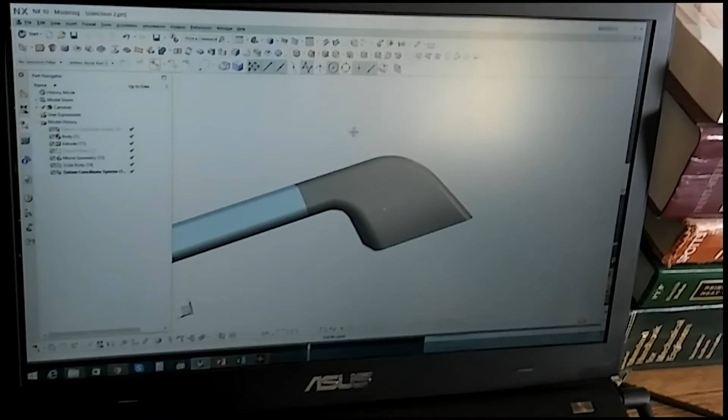Hello, my name is Steve Samuel from Design Visionaries, and today it's my privilege to show you a technique that we call the advanced shell technique for automotive components.

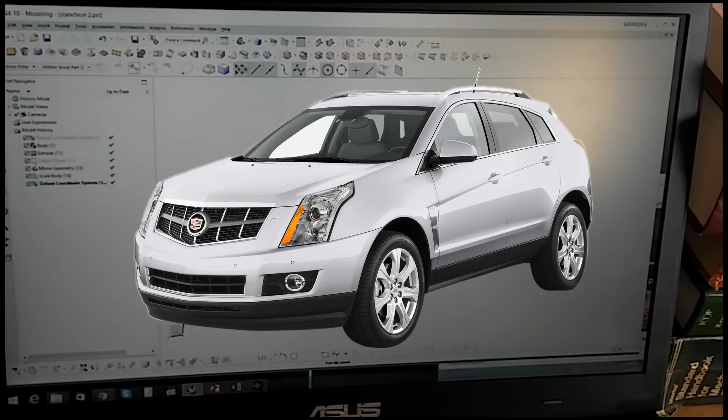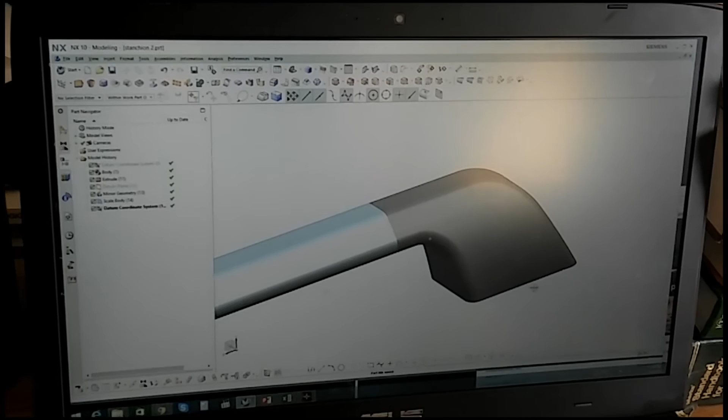Here we have two stanchions, a rear stanchion and a forward stanchion for an automobile. They're simplified geometries, and these are die-cast geometries. In general, the way this is done is you will get industrial design surfaces from a program like Alias or Rhino, or you can do them in NX if you're good enough. And they will be industrial design surfaces that will have to be shelled and turned into a real component. Now, as we do this little demo, we're going to be using something called the vehicle coordinates technique.

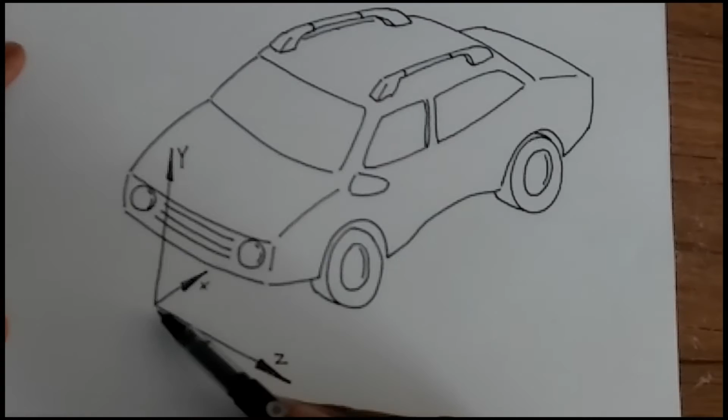As you can see, there's a coordinate system in this file. This coordinate system represents the coordinate system that we're going to use for this automobile. I've drawn this little graphic for you, so you'll understand that we're creating all of our geometry with respect to a coordinate system that everybody on the team agrees with. So if you're going to do some chassis work or some accessory work back here, you know that there's a coordinate system that everything has to match up to.

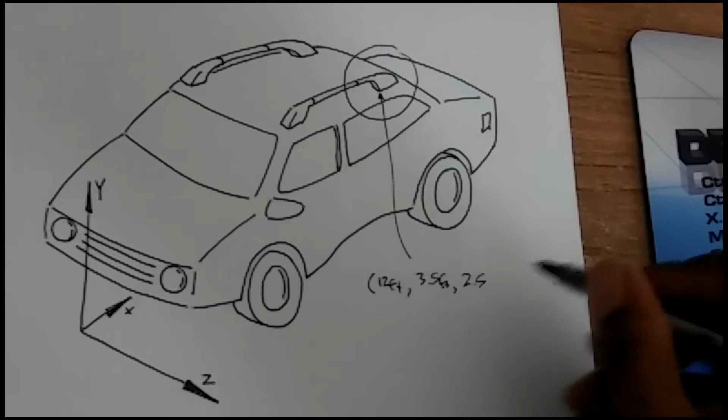For example, this stanchion that we're building has a vertex right here. That vertex can be described in XYZ relative to this coordinate system. The X would be about 12 feet, the Y would be about 3.5 feet, and the Z would be about 2.5 feet, let's say. Therefore, when we build this piece of geometry and we're finished, all we have to do to get it into the assembly and sync it up is to make sure that the central coordinate system syncs up.

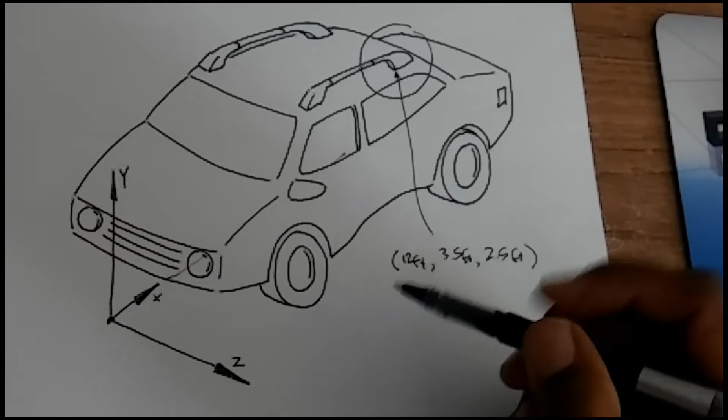So it's vehicle coordinates. I've got X going straight back, Y going straight up, and this ordinate is as if there were a flat piece of roadway, and this 0, 0, 0 ordinate is right on the roadway. So, to proceed, we can now start doing our various techniques on this back stanchion.

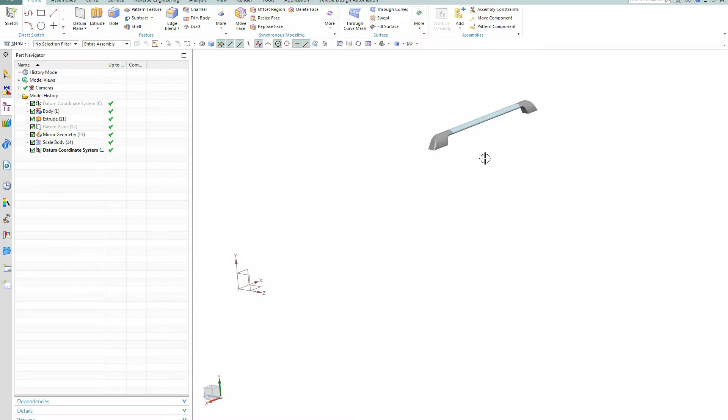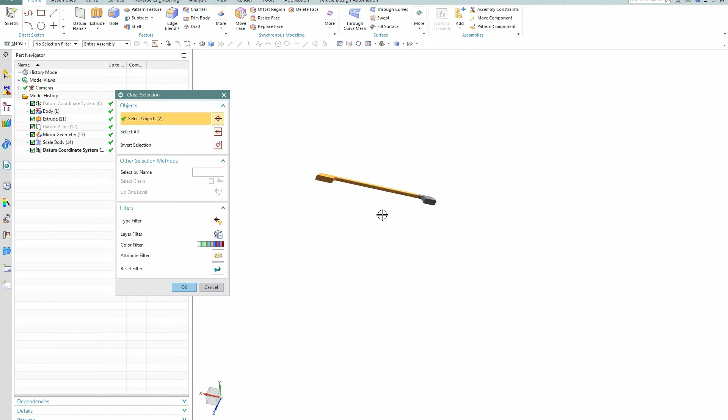The advanced shell technique is really great for creating things like die-cast parts and injection molded parts. What we have to start with is the industrial design surfaces sewn together in one fat solid, and now we have to scoop this out and do all the things that make sense to make this a die-cast part. The first thing I'm going to do is simplify the file, so we're working with just the geometry we want. The next thing is to establish a pull plane direction, the direction in which the two halves of the die-cast mold will be pulled apart.

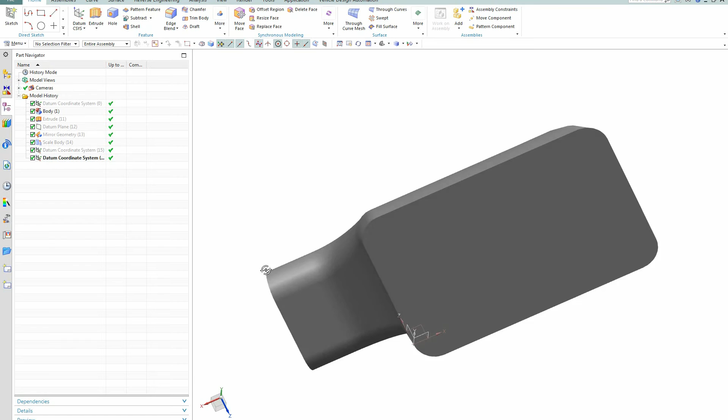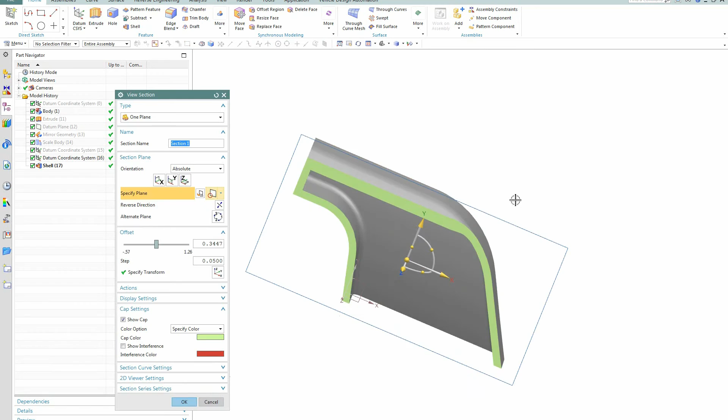So this is the Y-axis. We're going to use that as our pull plane direction to shell out this part. Now, if everything was simple, we'd use the shell command, type in a wall thickness, for example 0.1, and shell it out like that. This would be totally unacceptable for die casting, because as you can see, it does a nice job, but all of this geometry would be impossible to take out of the mold. There would be a huge undercut. Another reason is, in many cases, the geometry is too complex for the shell.

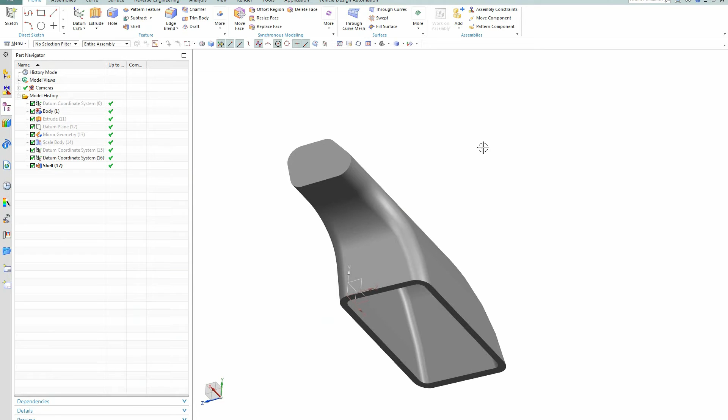So I'm going to delete that and bring back the geometry. Now I'm going to show you the shell technique. I've established the pull plane direction, the Y direction. As an overview, I'm going to show you how to create a parametric and associative copy of the outside geometry, then hack away at it and offset it to create, in essence, the inside of this component. Then I'll be able to cut ribs and stiffeners and all these different features, and easily do one large subtract at the end to have a finished piece.

To start with, we need a command called extract geometry. It's in the feature more command, under the associative copy group. In this feature, it is very important to have the associativity switch on and the fix at current timestamp switch, because these make sure that if I make any changes to the original surfaces, it's going to be duplicated and redone, and everything's going to go with that.

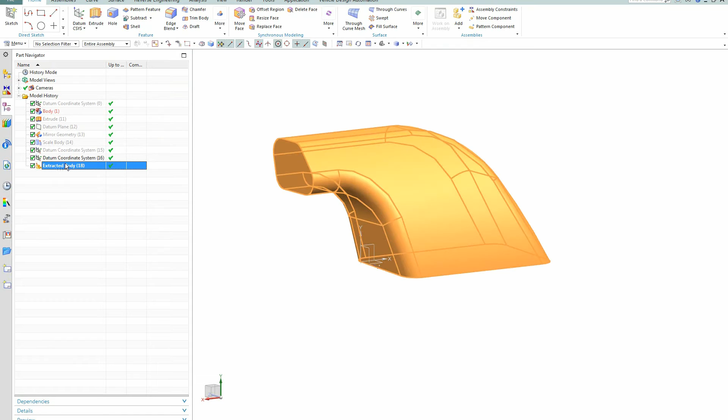So you'll definitely want to have these two switches on. And I select the geometry, I say OK, and that creates an extracted copy. Now the extracted copy is right on top of the original, and so I'm going to hide the original and bring up the copy. And as you can see, I'll put a color code, light blue, deep sky blue, on

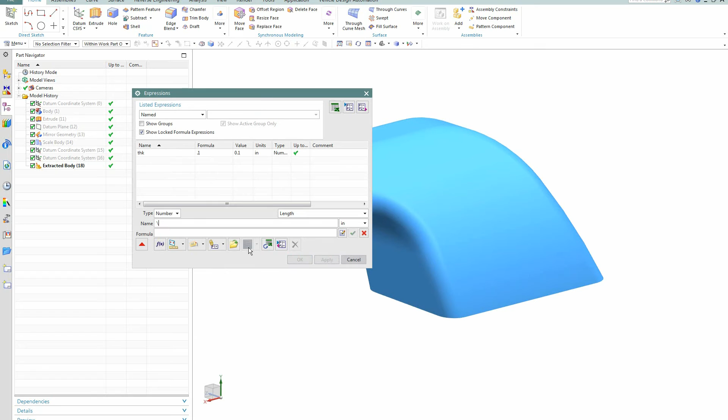the copy. Now, NX has a very, very powerful thing called an expressions editor, and I'm going to type in a variable, thickness equals 0.1, and that little variable is going to help me as I go through the process of creating different geometry. When I create ribs, I want them to have a relationship to this wall thickness, and when I do some other operations, there's going to be this THK, this variable that drives everything. That's really a very powerful technique.

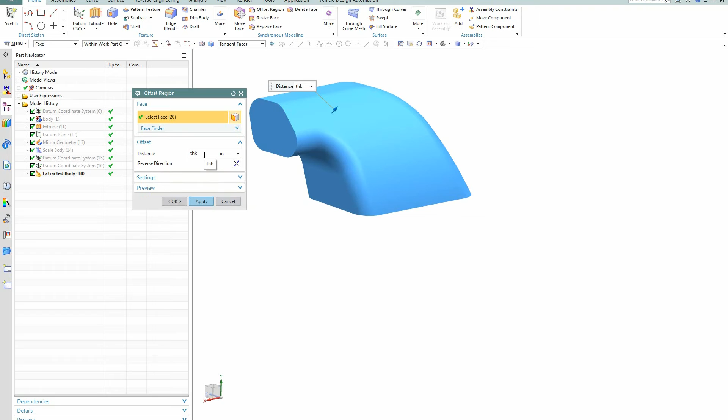My very next step is to offset what I can. I'm going to use this command called the offset region, and I'm going to select a number of tangent faces, and I'm going to set those faces equal to my variable THK. As you can see, when I type in THK, I need to do a minus THK. That shrinks the geometry down, and as you can see, if I have a little clear transparency of the original outside, what I'm doing here is creating a piece of geometry that represents the inside.

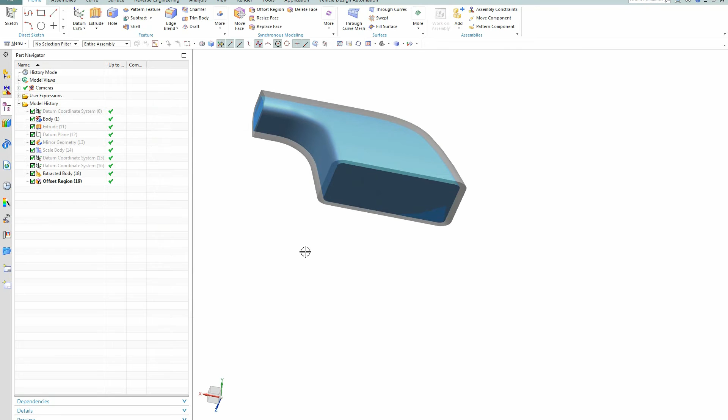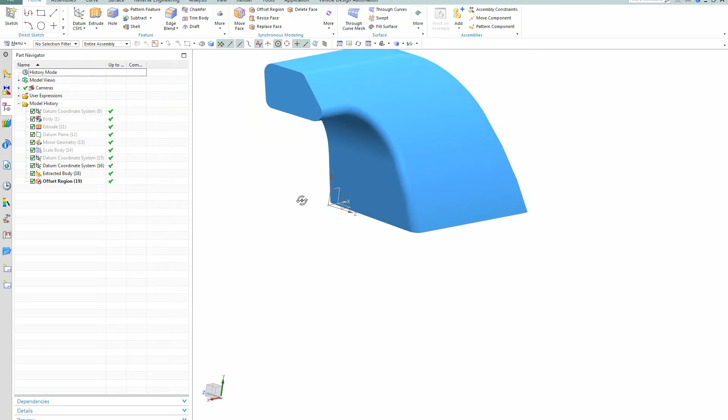So now that I've done that, I'm going to start to hack away at the model that I've created. Oops, let's go Control B. Let's get rid of that outside for a second. And I'm going to start hacking away at this model. Now if I bring back the coordinate system that I made to represent the pull plane direction, you can see that if I view it in this direction, all of this geometry out here is undercut, if you will. Every surface on this piece of geometry has to be tilted relative to the y-axis, because that's going to be the direction of pull.

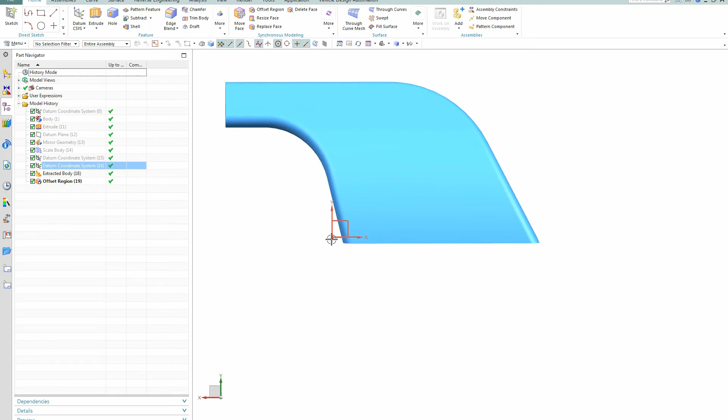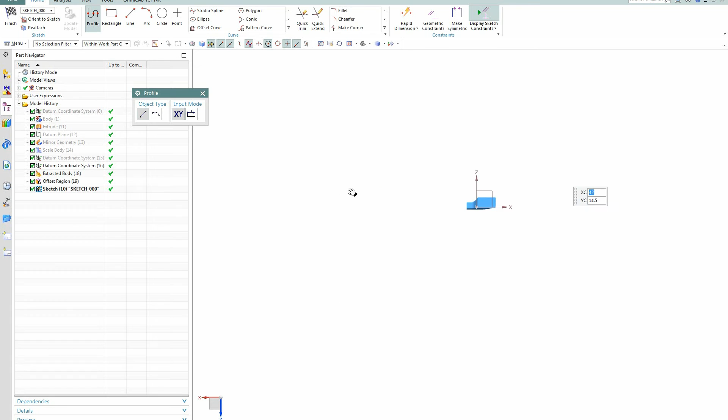So, and it's got to be tilted in this direction, which is opposite of that surface, and it's opposite of that surface. So now I'm going to use a nice little crafty method to lop off, if you will, the geometry that I know will give me troubles. And in order to do that, I'm going to do an extrude command, and I'm going to use a plane that is orthogonal to the direction of pull. And what I'm going to do is define a little piece of geometry. I'm going to use the project curve command to get that little piece and that little piece there.

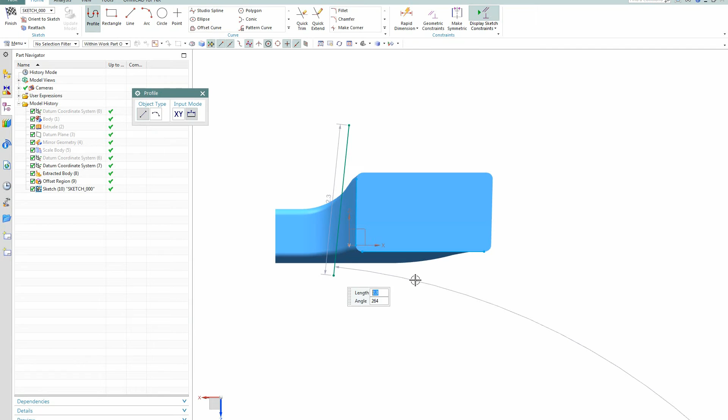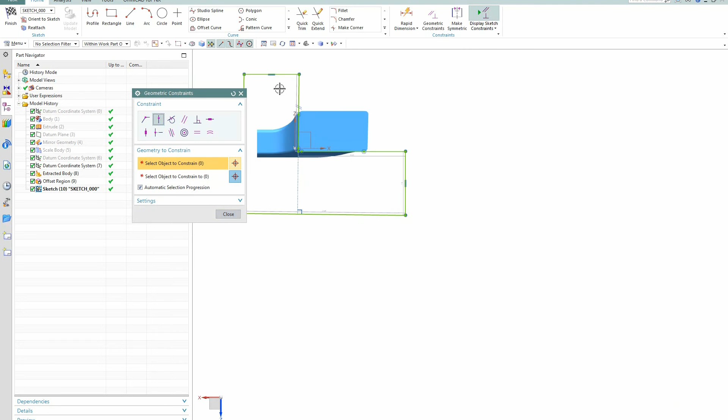And what I need to do is establish a cutter, if you will, this can be crude, that I'll use to cut off all the geometry that doesn't fit. So for example, I'm going to use a command called point on curve to get this cutter aligned perfectly. There we go. And I'm going to make sure I have enough geometry so that it will cut everything that I need to cut. And now when that geometry is extruded, we'll just extrude it like that, and we'll go from 0 out this way. So that's going to be a good cutter.

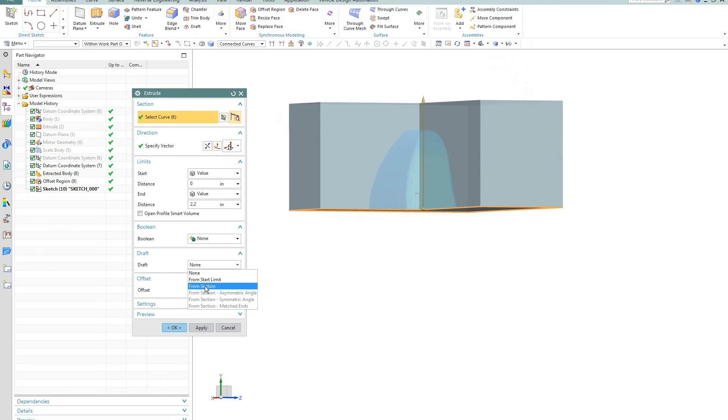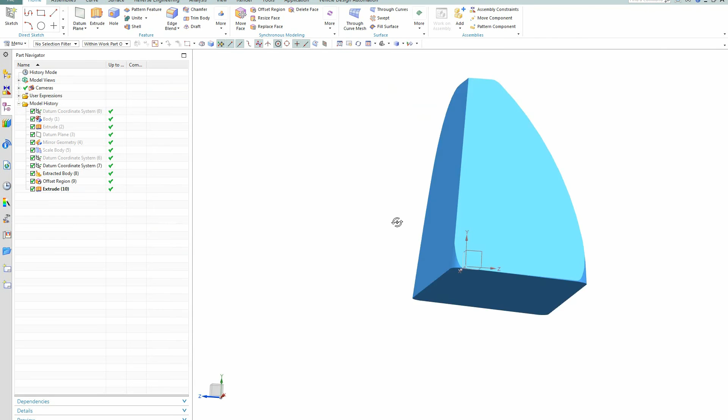But as we cut, we're going to use the draft command, and let's just assume that 3 degrees will be a good draft angle for these surfaces. So when I subtract this big cutter block from the original geometry, I get a piece of geometry that is far more suitable for the interior, if you will, of what we're creating. Now, I don't want any sharp corners on this piece of geometry because that's a stress riser, and I'm going to put in an arbitrary blend, if you will. Let's just change that a little bit.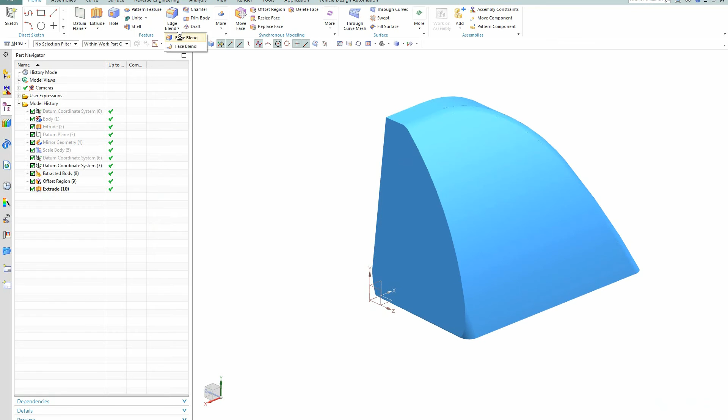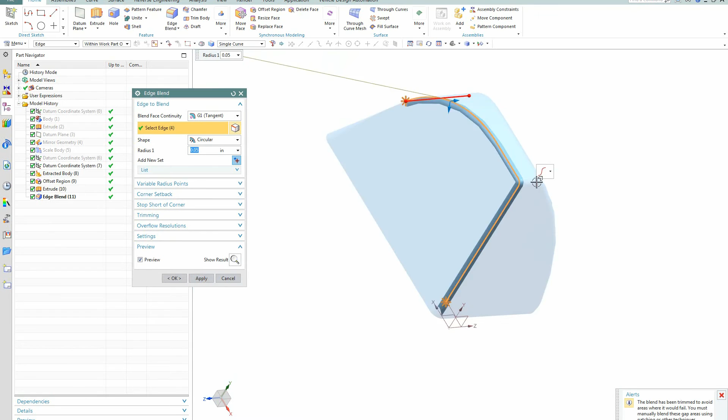We'll go to the edge blend tool, and we'll go to the selection intent manager, and we'll just select the portions that make sense to blend. Say apply that way, and we'll blend off these edges as well. Got to select individual ones that make sense and leave out the ones that don't make sense. So there we go. We're going to blend those edges. And now we have a much better piece of geometry.

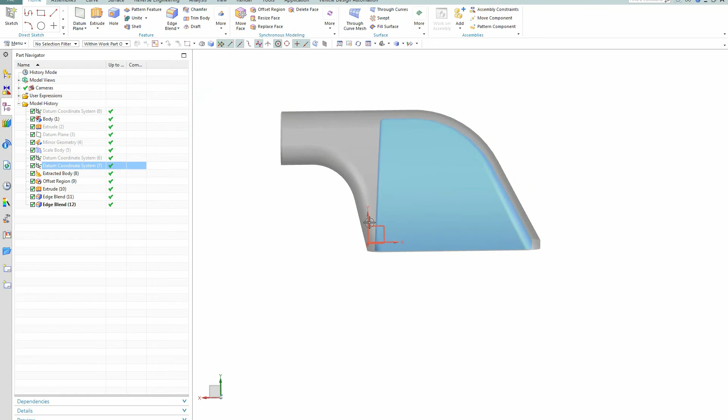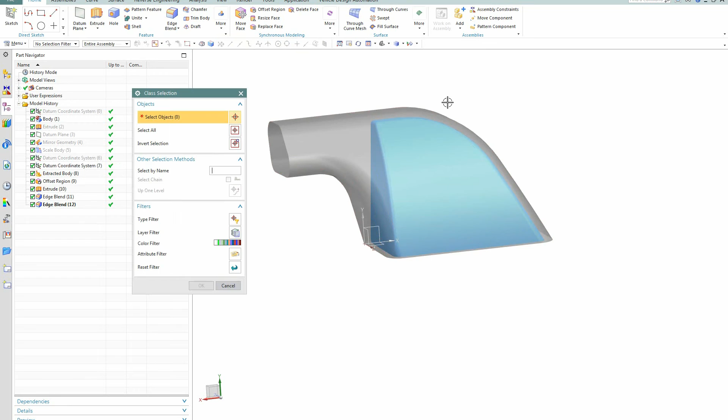If I bring back the original again, you can see that if we're assuming the y-axis is the direction of pull, this piece of geometry is actually able to be pulled out of the mold, and so is this. This is angled relative to the y-axis. Terrific. Now, we don't want to just take this out. We want to create certain ribs in our internal cutter, if you will. So now, operating on this piece of geometry, we can do that.

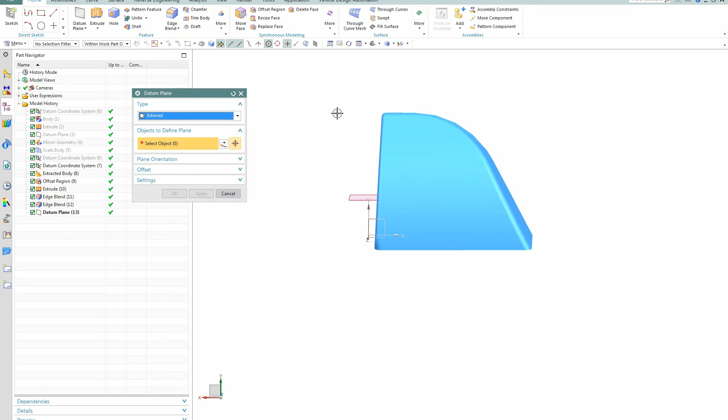We can go and we can create a datum plane that is offset from the pull plane for a reason that will become very obvious in just a second. So we're going to create a datum plane. I'm arbitrarily going to give it 0.5 inches. And on that datum plane, I'm going to sketch a pattern of ribs, kind of a honeycomb, that I want to have performed on my cutter. So I'm going to go to the sketch command, and I'm going to select that plane on which to sketch.

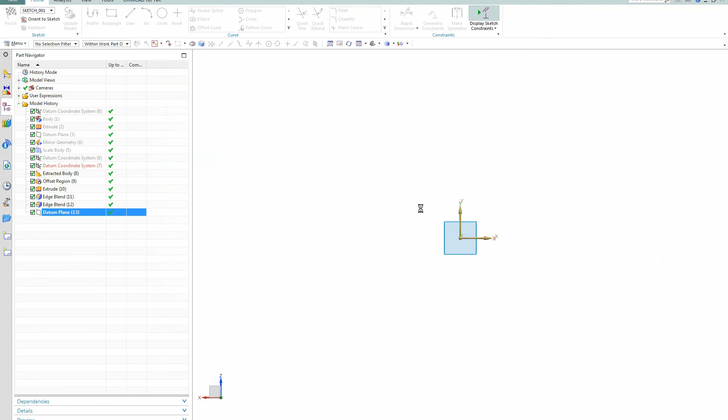Okay. Let's do a fit command here. Let's get over here. And what I'm going to do now is just by eye. Of course, if this were a production job, I would take more time and do this. It would take a while. It would make a terrible demo. But I'm putting in these rib structures, and in just a minute you'll see how powerful this technique is.

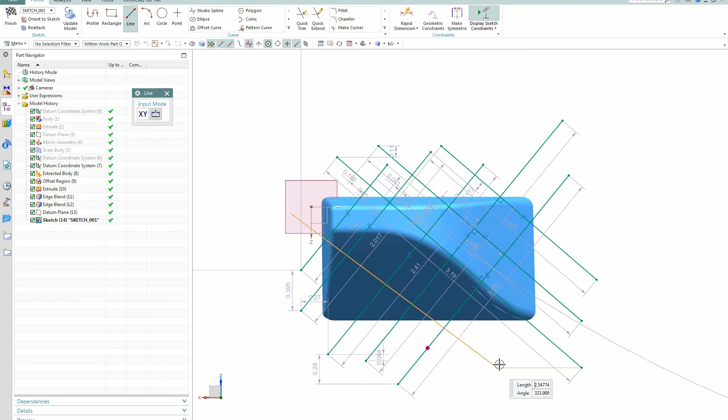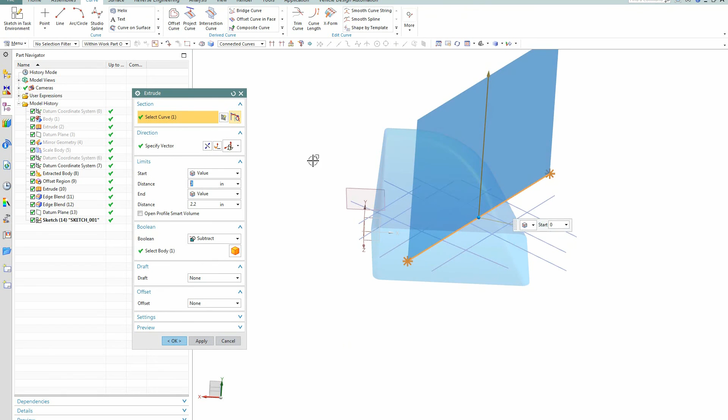So I'm putting in a series of curves that represent the ribs that I want cut out of this die. And I'm going to now extrude them with a taper. So I'll select this, and as you can see, I'm extruding from 0 to some arbitrary number. Here we go. And when I extrude, I can use this command called Two-Sided Offset. And I can use a formula. As you can see, it's THK divided by 2 times 0.6 and minus THK divided by 2 times 0.6.

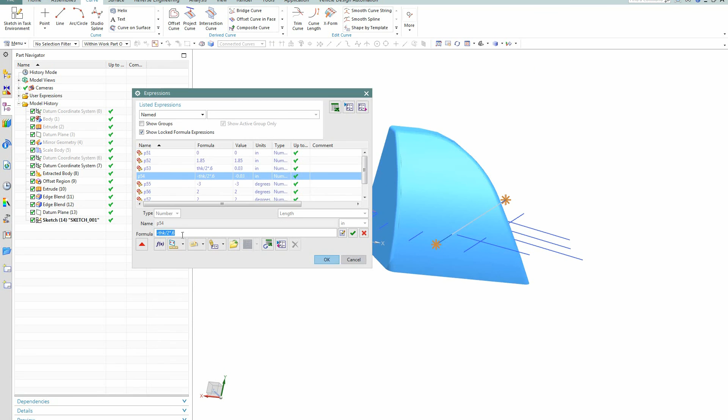So what we're doing is we're taking the nominal wall thickness of THK, whatever THK might be, and we're multiplying it by 0.6 so that the ribs are thinner than the wall thickness. That's just kind of standard operating procedure. And then we're going to take that section and give it some draft. In this case, I'm going to use 1 degree. And that's what we're going to use to establish our rib structures.

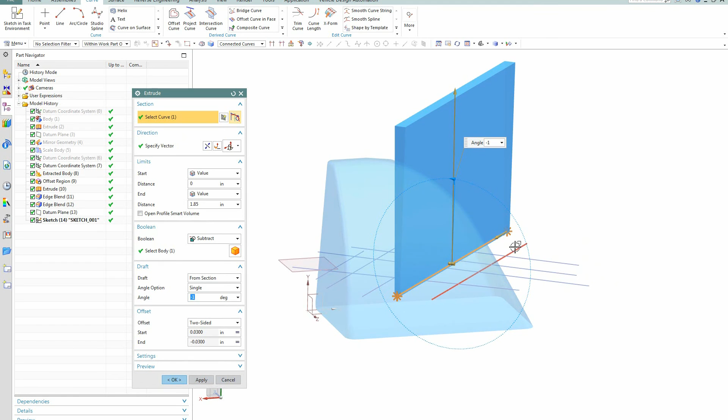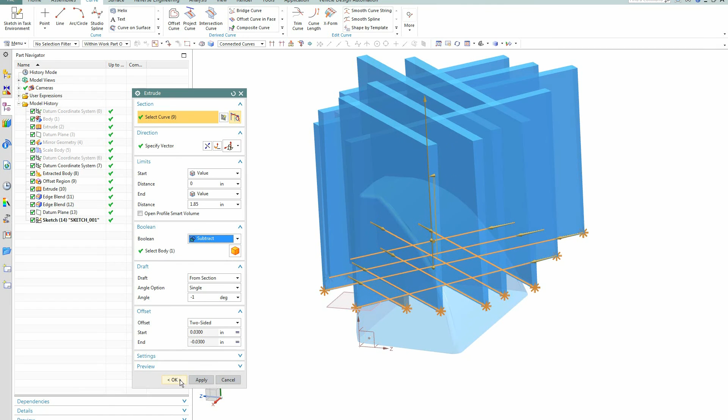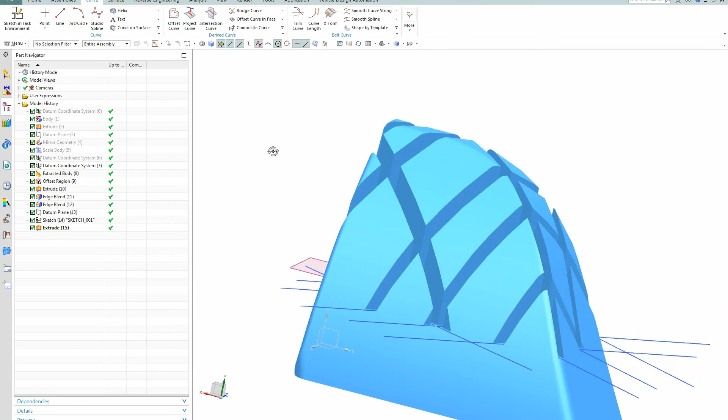So now that I've got that all typed in, I can select a number of these line segments that I just arbitrarily put in. And of course, if I were to do this in a production mode, I would have been more careful about where those went. But there they are. They're all cutters. And I'm going to subtract them all from the main body. So there we have it. This will become a cutter. And the fact that I can establish these rib cutouts before I do the main subtraction gives me a lot of power. It makes this technique very, very easy.

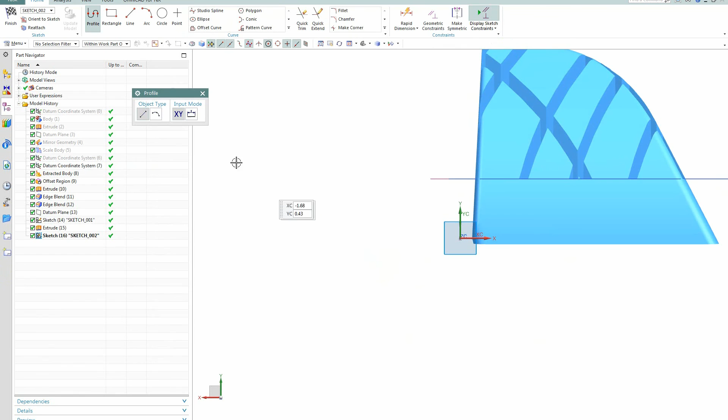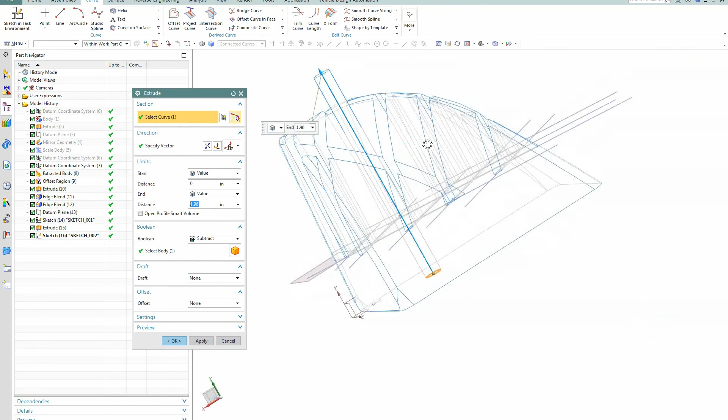Now I also want a mounting boss in this piece of geometry, and so the mounting boss can be done with an extrusion as well. So I'm going to hit the X key. X key takes me right to the extrusion ability, and I'm going to select a surface or a plane right there that gives me the direction of pull again, and I'm going to create my circle that represents the mounting boss, and the mounting boss has to come through and be subtracted this way, and it also has to have the draft angle on it, as everything does when you're doing a die casted part. So that's going to be subtracted from my cutter as well.

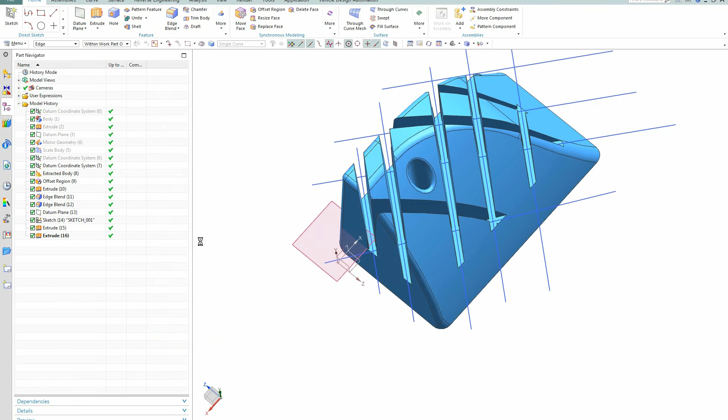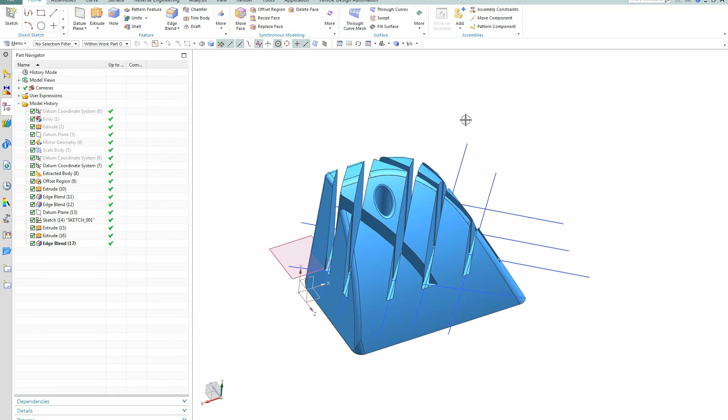And I'm even going to take one little more moment, and I'm going to put some blending around the mounting boss, like so. And if this were a production job, I might spend a lot of time getting rid of some of these sharp corners and blending things and really working on this. But the long and short of it is, now I've got the cutter that I'm going to use to subtract out everything that I need in this tool to make it a die cast part. So I'll bring back the original, say OK.

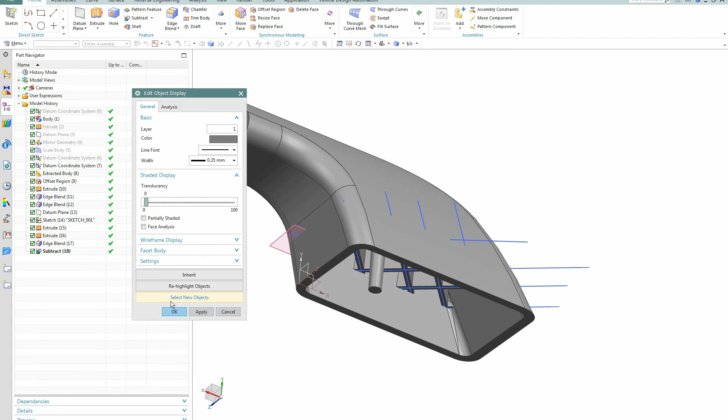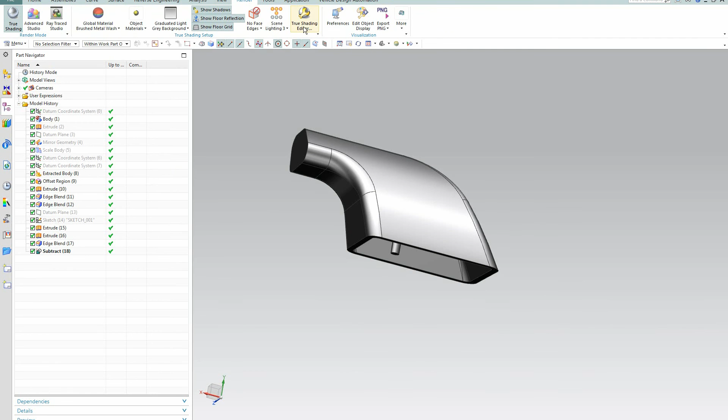I'll go to the subtract command, and there's my target body, there's my tool, and let's just take away the transparency so you can understand what it looks like. I'm going to use the Ctrl+W command to get rid of the sketches and the datum planes, and I'm even going to take a moment and render it for you with the True Shading Editor, and there you have it. There's the finished part, and as you can see, it's all set for the die casting. The ribs are there. The mounting boss is there. It's hollowed out in a way that can actually be molded.

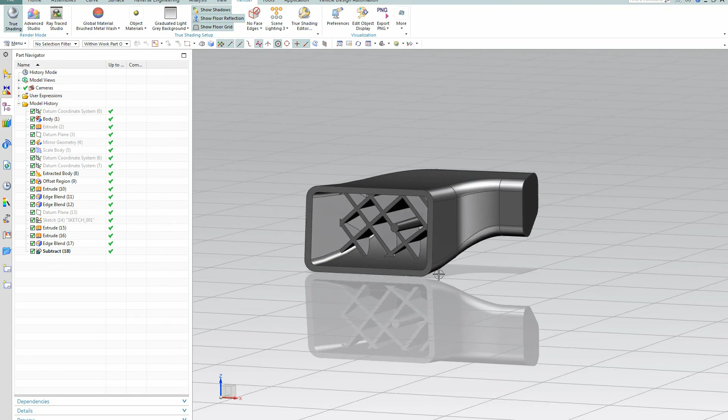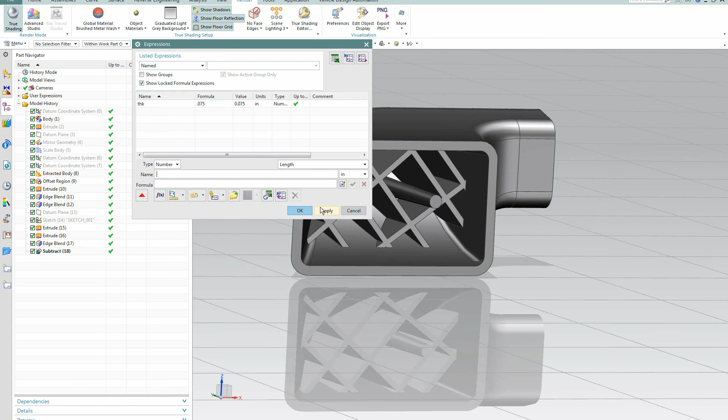And finally, the fact that I used that THK variable in the beginning gives me the ability to change all the wall thicknesses and the relations that they have to the fins very quickly. I could just say Control E, and that brings up the expressions editor, and I can use this THK variable, and I could make it 0.075, for example. And as soon as I say apply, everything has to update because everything was created with respect to that thickness. So there you have it. Very quickly I changed the thickness. It's beautiful. Very, very powerful technique that will save you untold hours.